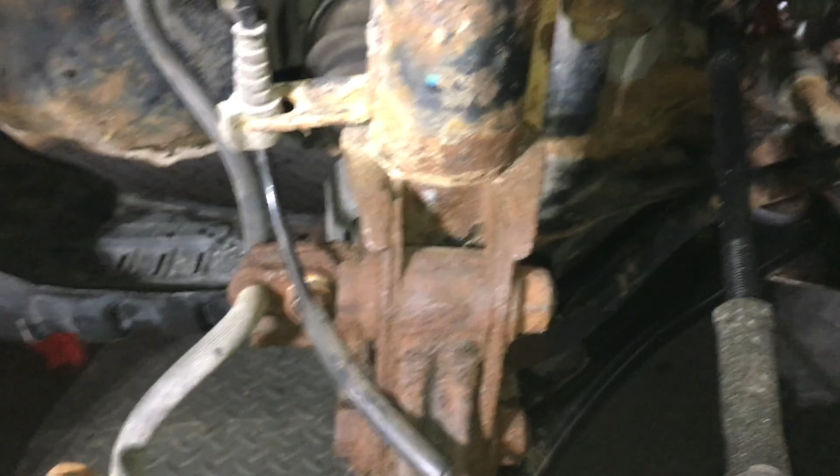Okay, so the struts next. I've already shown you. There's a video you can look in the back catalog showing you how to replace the struts. But essentially, it's just the two bolts and the nuts here. Do not reuse the nuts. The manual says the bolts apparently you can reuse.

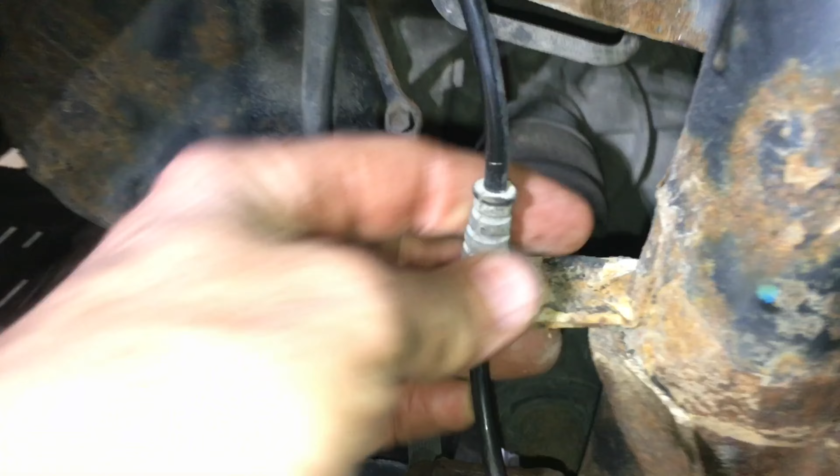Just remove the wheel speed sensor. Just a little clamp. Little 12mm headed bolt here for the brake line. Just remove it. And yeah, these are not cooperating, so I'm just going to cut these off because I'm going to replace them with the new struts, the links.

And up top, just index the plate here so it'll go back in the same spot. Just a matter of replacing the rod end nut here, and the plate will be removed, and the whole strut should drop out. So once the bolts are out, as you can see, they came out actually not too bad, so lucky.

Just make sure that you're ready. Don't let this unload and flop forward, but of course the control arm is there, as is the tie rod. Just support it as you actually pry it free, and as you can see, the whole strut is free here now. Just a matter of undoing the nut here that's on the mount. Hold it internally with a 6mm Allen key, and if you have an offset wrench, ideally 17mm for the nylock nut that's on top of the rod end.

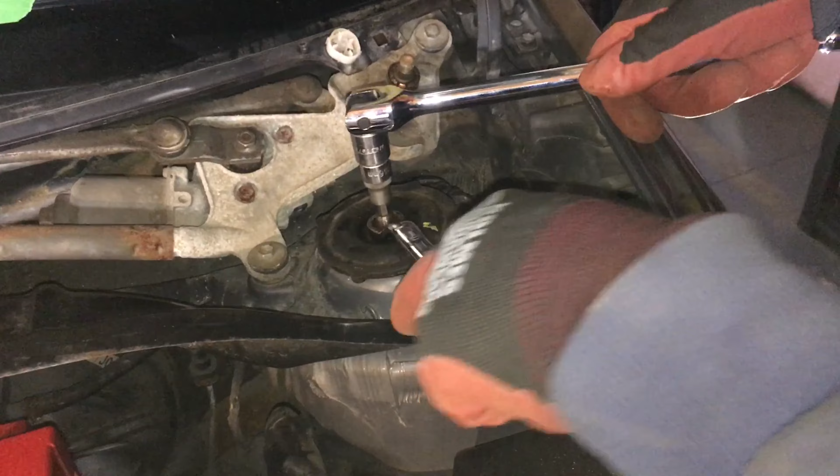Go ahead. Oh, okay. Yeah. There you go. There we go. Much better. There we go. There we are. Yeah, it's a little extra.

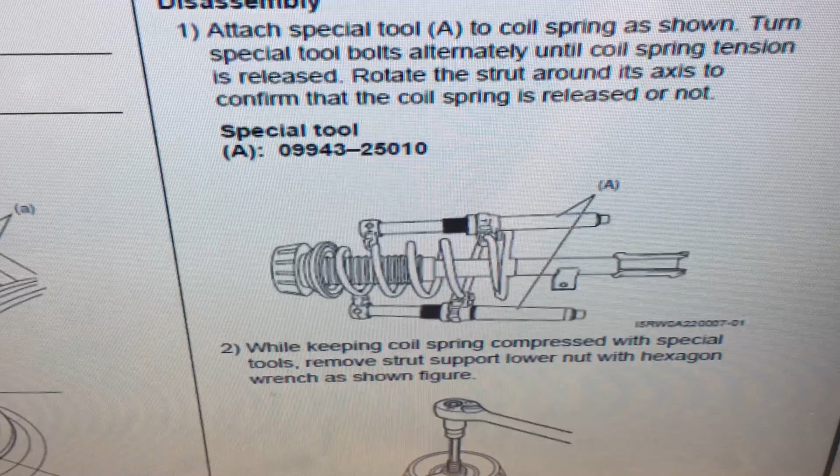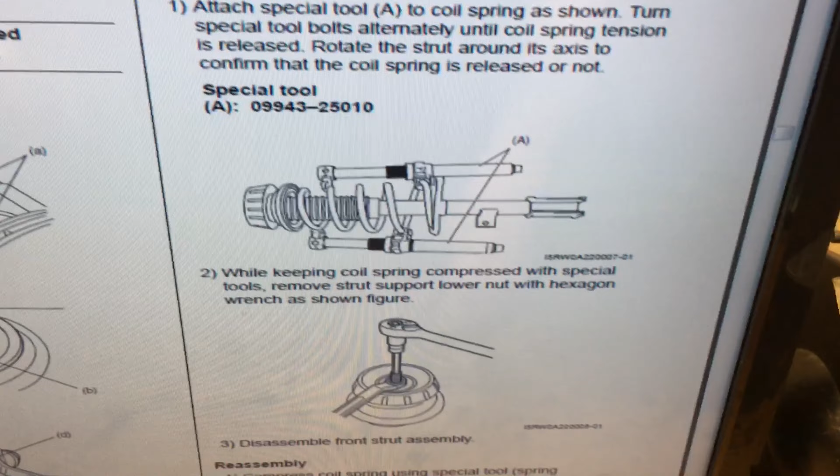So I'm just back at it here, guys. I've got both the struts removed. So I'm just going to go about removing the coil, transferring it over to the new struts, and bits and pieces transferred over. I've already done a video on the struts. I'll put a link in the bottom in the video description, so you can take a look at it in more detail. There's no point in really repeating myself, but I'll maybe show you a few points of interest along the way.

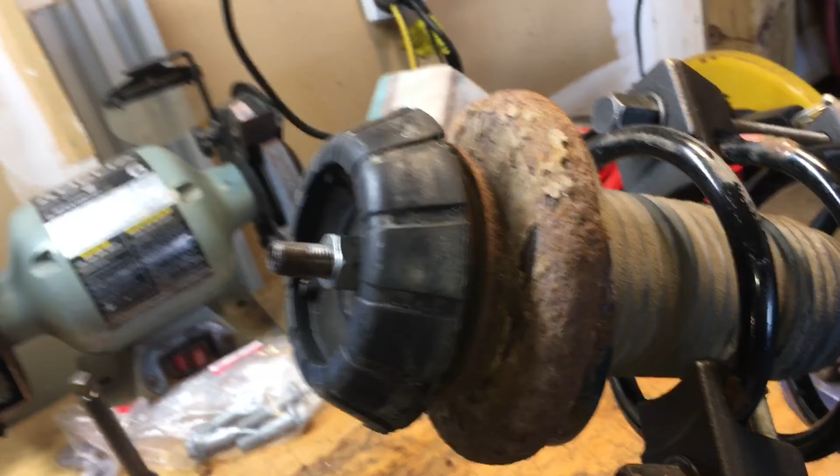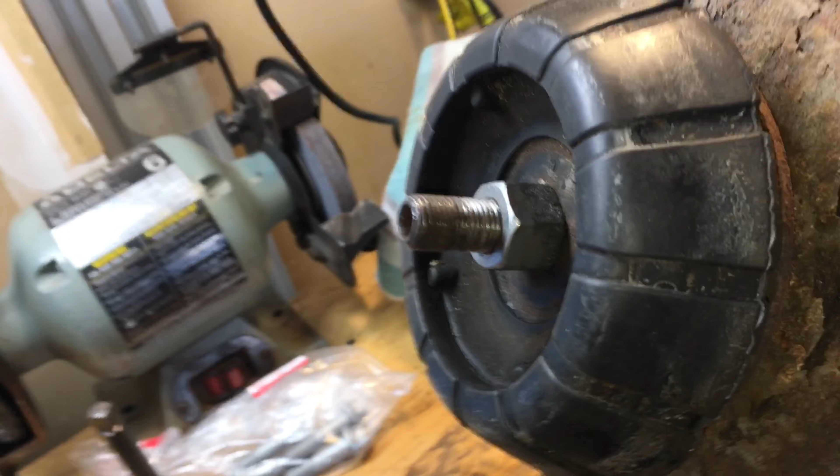So not as fancy as Suzuki's tooling here, guys, but I've got my Widowmakers on here in order to compress the spring, take the tension off the rod end and the shock itself within the strut, so I can undo the nut here, right? Just take a measurement of the distance of the nut, just how deep it is on the threaded portion of the rod, and we'll be able to disassemble it without this exploding in our face, hopefully.

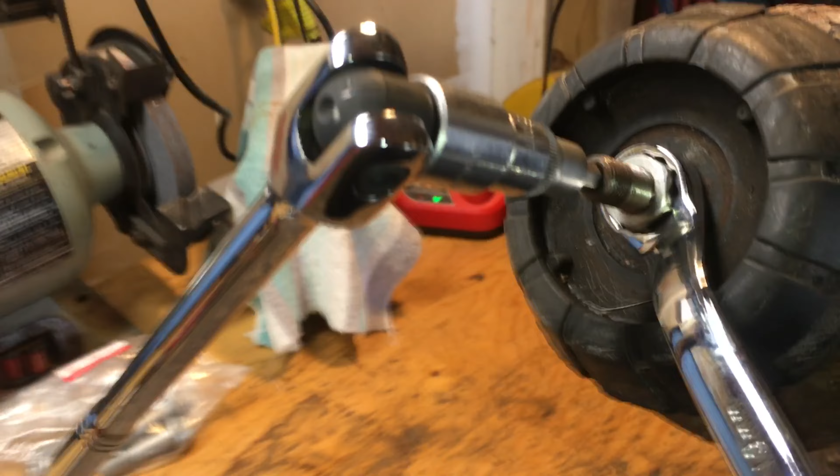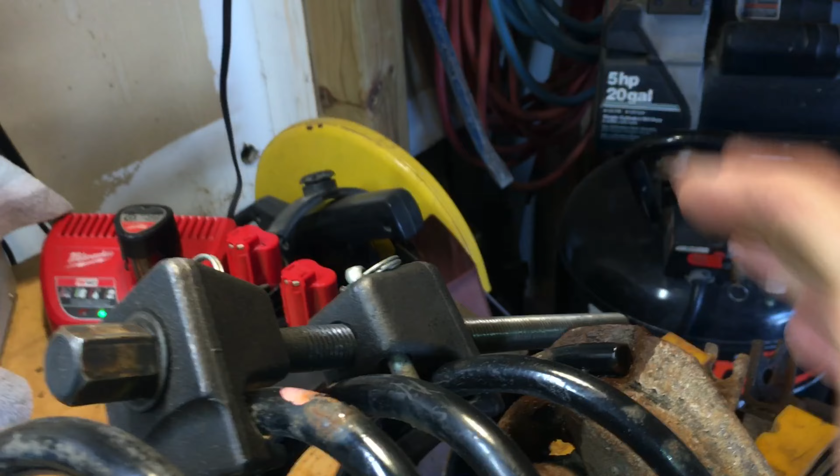So as the manual illustrates there, guys, you'll need a 6mm. You hold the inside of the rod Allen, and a 19mm, preferably offset, as it's sunken a wee bit into the mount, and just spin the nut off. Once it's all unloaded, of course, so the spring is compressed here. I can't do it with one hand, but I can rotate the spring on the saddle, so I know it's all unloaded.

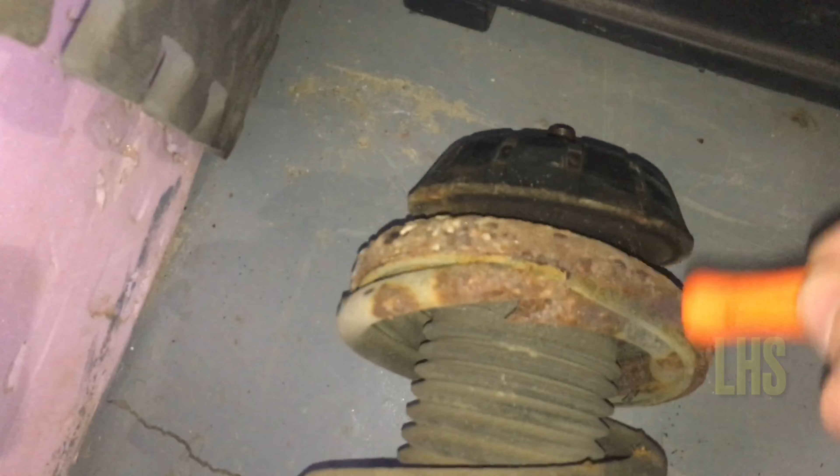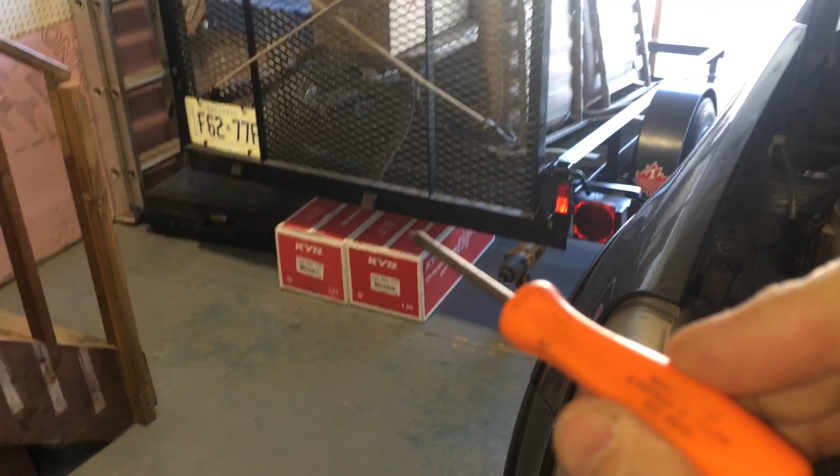Sometimes you can't win for losing, huh? So I never noticed on the removal of this, but on closer inspection, you can see the spring is obviously broken, right? So this threw a wrench in the works for me, because I had already ordered the strut, the damper portion of the strut, as you can see there.

So you cannot buy just the springs for the SX4 on the aftermarket, as far as I can tell. Perhaps I'm mistaken, but I checked a bunch of websites. I called a number of local places. They couldn't find a listing anywhere, so at least I couldn't get the springs, let's put it that way. So I had no option but to actually buy the springs from Suzuki. Yeah, there are still places in Canada that will sell you Suzuki genuine parts, right? Mitsubishi spring apparently, but there's lots of Mitsubishi parts in the SX4.

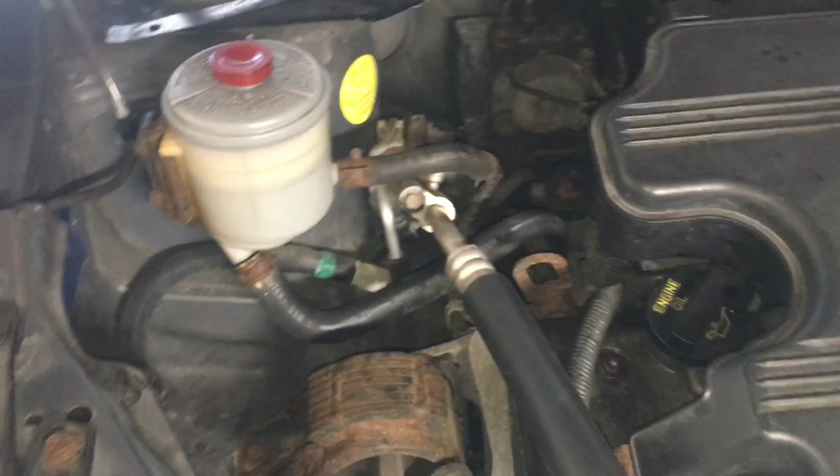So faced with the expense of returning the dampers and then buying the Readystrut, it was changing 4 quarters for $1 type thing, so I decided just to go buy the spring, right? So that threw a wee bit of a wrench in the works, but we'll carry on. We'll be replacing both springs. I could have cheaped out and replaced just the one, I suppose.

It's always best practice to replace parts in pairs, you know, springs, dampers when it comes to suspension. But anyway, we'll carry on. A couple of new springs.

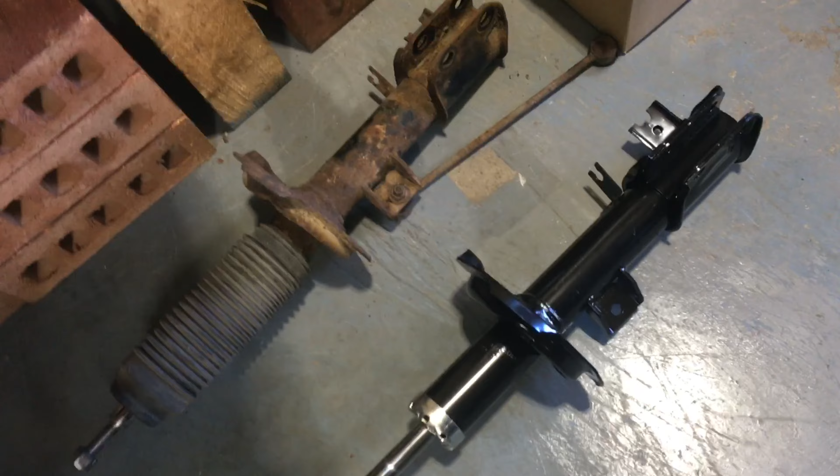So it's been my experience, guys, that the KYB struts and dampers really closely resemble the original equipment. This is the right hand strut. That's the right hand part number. Left hand in there still.

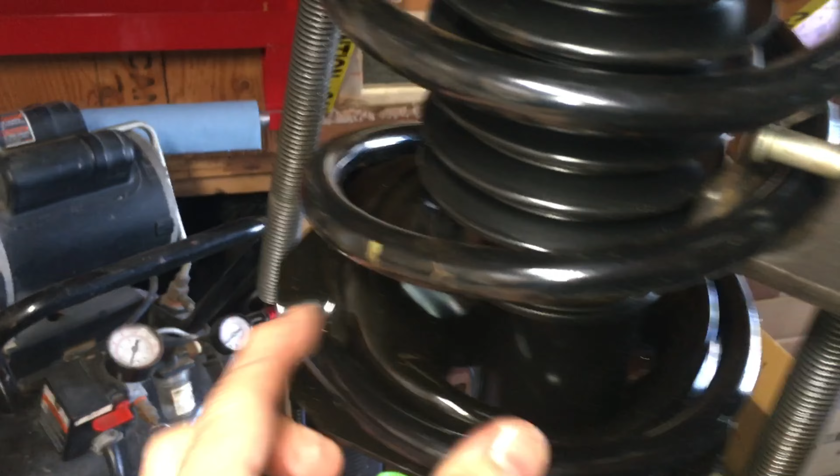Left hand. So with the spring held in my vise here, guys, just to keep it stable, you can see the spring is actually seated against the stop in the lower seat, and the new boot is in place. It looks a wee bit different. Just follow the instructions that come with the product. It tells you how to orient things.

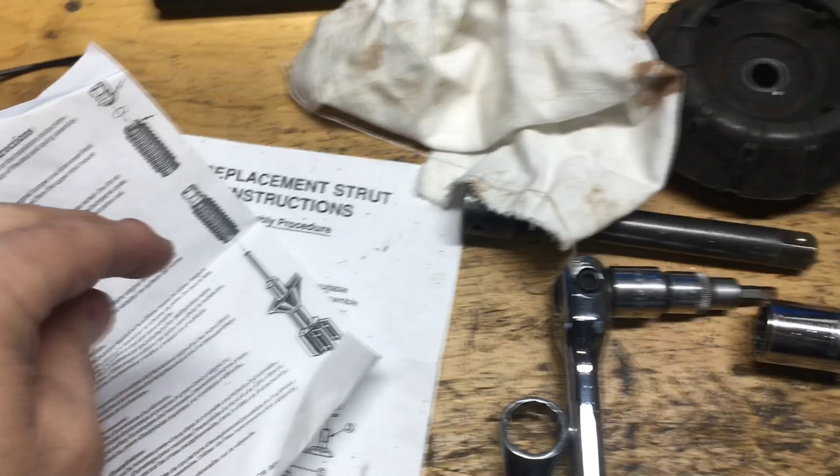And yeah, I've got just enough thread here that I can put the upper spring seat in position. Just got some anti-corrosive on here. It's quite heavily corroded. I've scraped it, but still sound, I think. I hope. And the bearing goes in position, so it kind of stacks like this. I'll show you on the drawing, and then the new nut goes on top. Yeah, makes sense. I'll show it to you on the drawing.

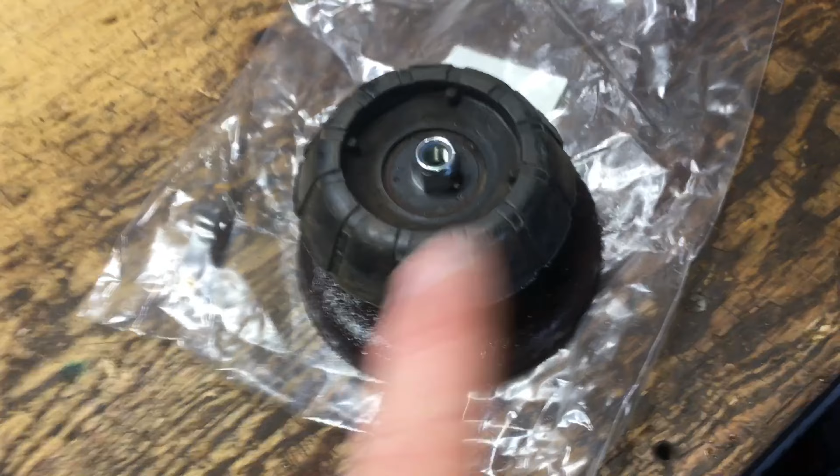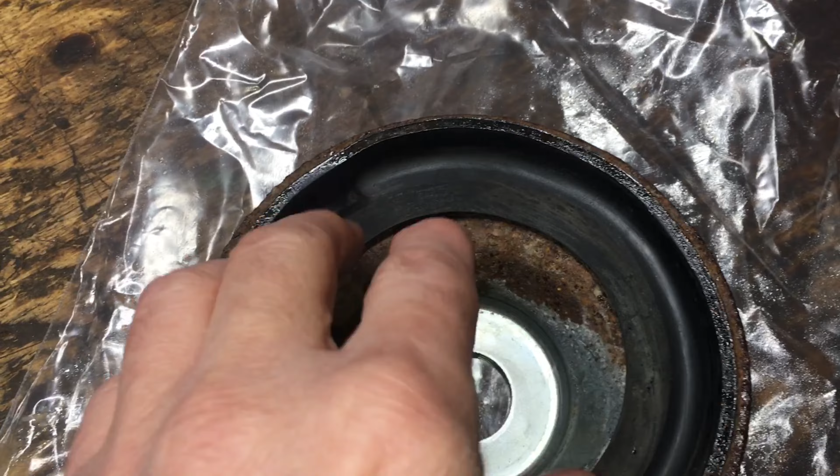But a couple of points of interest here. One was make sure the spring is oriented correctly there. Mark everything if you're going to reuse it. It makes things easier for when you put it back, right? But since this is a new spring, use the inside of the upper spring seat. There's the rubber cushion, the rubber isolator. There isn't one for the bottom, by the way, as far as I can tell.

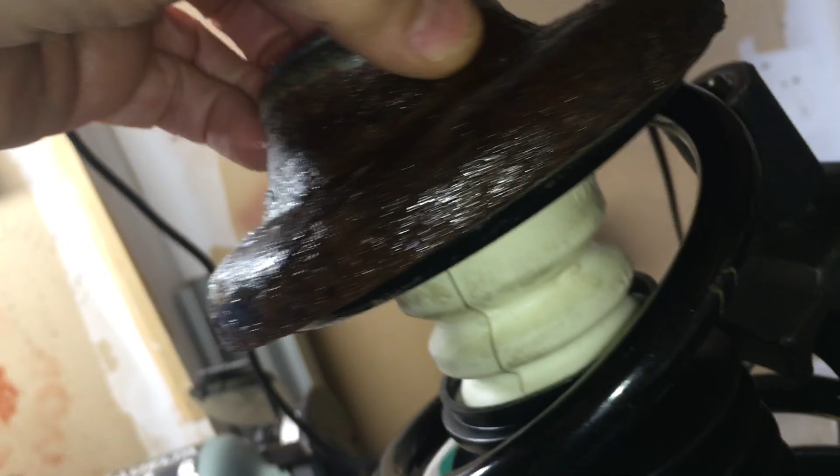And you can see here where the spring actually sits. Now keep in mind, this is not symmetrical. You can see the cant to it there. So it's important that this is oriented correctly. Just use the depression in the cushion. You'll get it to drop down. You'll feel it. I can't really show it to you, but you'll feel it.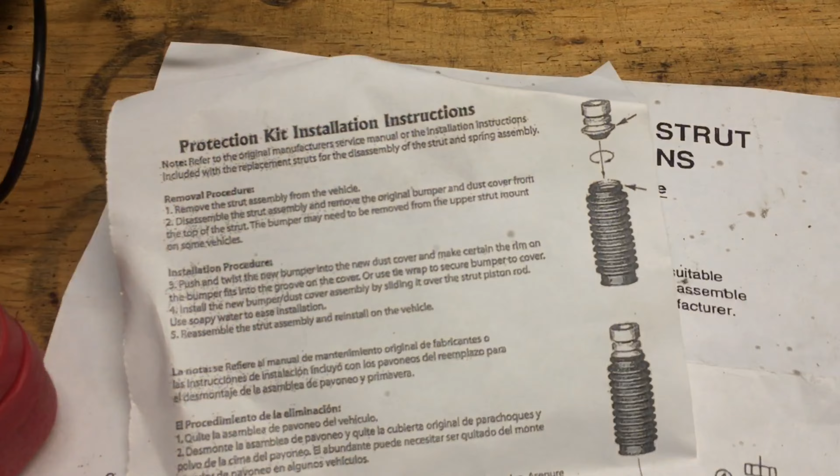So here's the strut assembled, guys. Precariously balanced on the workbench here, just so you can see it in the correct orientation. And again, here the focus is on the stack itself. Again, the original bump stop and the boot a wee bit different. So this configuration looks a wee bit different, but it's assembled as per the instructions. And the important part is the stack, right?

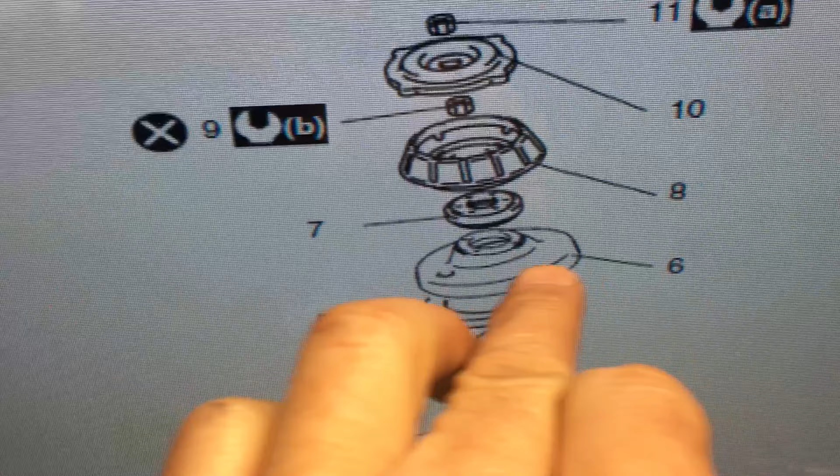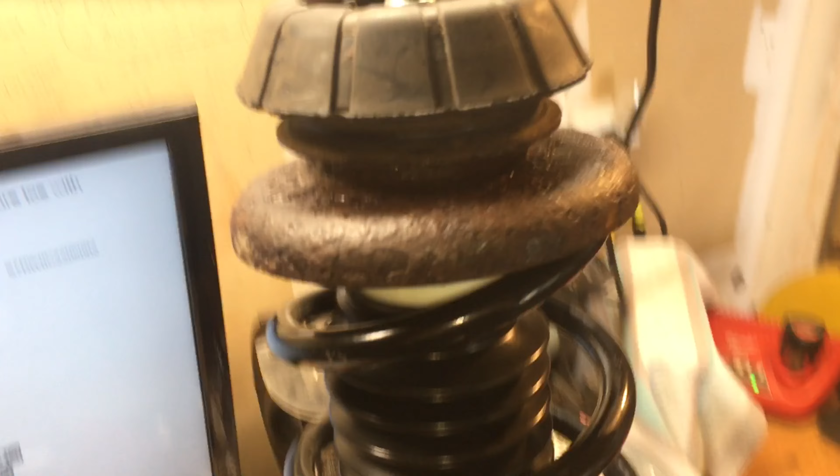The cushion ring, the upper seat, the bearing, it needs to be oriented correctly. It's obvious which way it goes. It slips down into the upper seat, and then the rubber mount itself, then the nut, and of course the plate and the nut is to be assembled as is on the car itself, right? And that's what it looks like. Just make sure everything is oriented correctly.

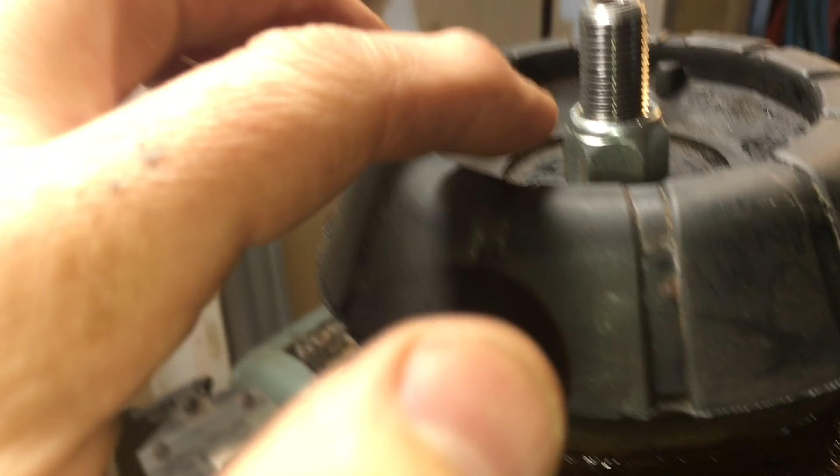Here's the torque spec, although you're going to need a pretty fancy tool in order to be able to hold the rod end here and actually be able to put your torque wrench on it. You're going to need a pretty low profile and slim crow's foot to get on it. I'll be honest, I just held it and torqued it up with my 17mm offset spanner there.

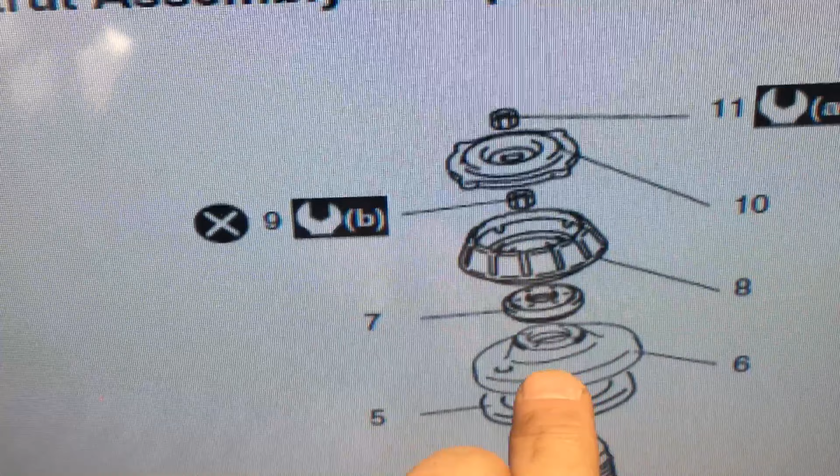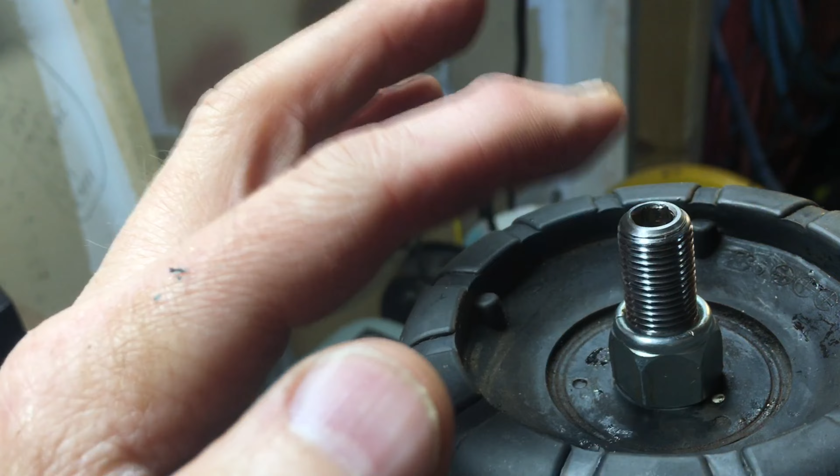Don't reuse the nut that goes on the end of the rod end. Surprisingly, there's no washer between the rubber mount here and the nut. It's a nylock nut. Do not reuse it. A new nut comes with the damper. I've had these cars a lot longer than I ever anticipated, guys.

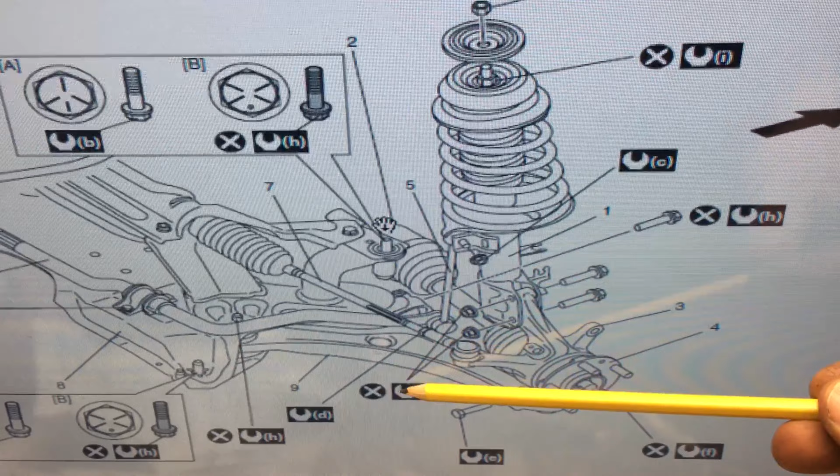You might thank yourself later if you just anti-seize the shank on the bolts. We've got a thread locker, entirely up to you. New nuts are required as per the manual here. As you can see, you can reuse the bolts. The installation consists of the two bolts and the nuts, of course. This is the forward orientation, so the nuts should be on the aft side.

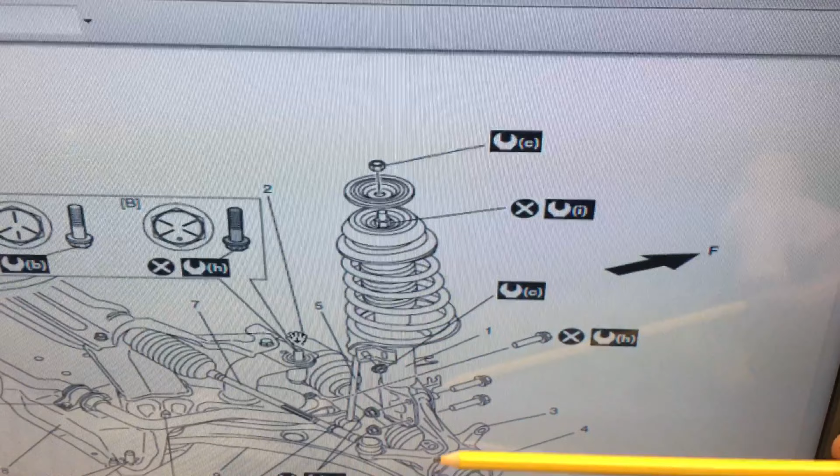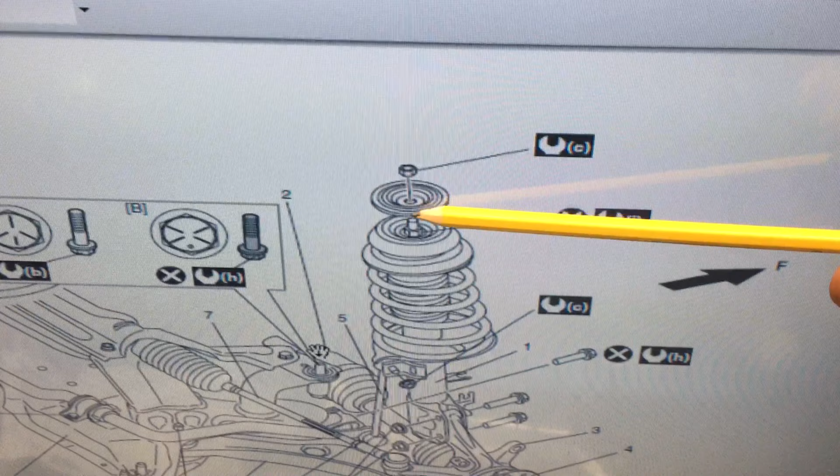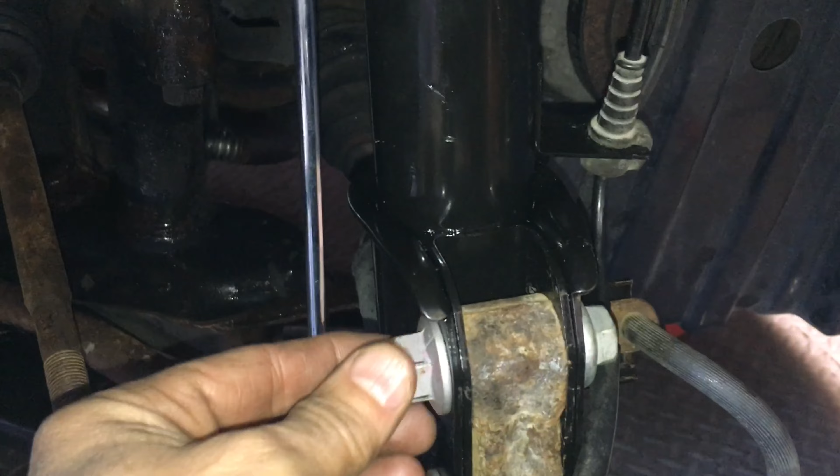The strut itself, we'll put on a new vertical link shortly, and there's the brake line to be secured, the wheel speed sensor, and on the top here we have the mounting plate and the strut nut. So pretty much fully assembled here, guys. The bolts and the nuts, again, the nuts on the back side, to 101.5 foot-pounds, 102.

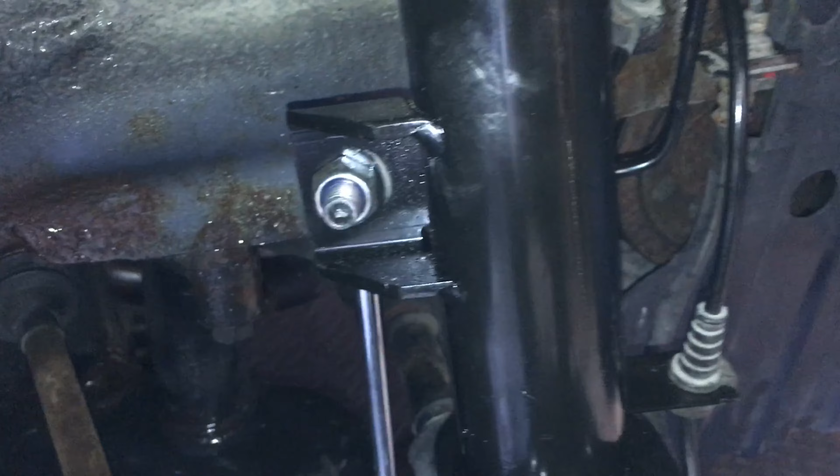One thing I can mention here, don't ask me how I know this, make sure when you drop the strut in that you have the wheel speed sensor harness on the right side, which is the forward side of the installation. Otherwise you'll trap it behind and then you have to take your nuts off and, you know, the usual nonsense. Make sure you secure the brake line with no twist in it, of course. The dog bone here, the nuts are torqued to 32.5 foot-pounds if you're very particular about things.

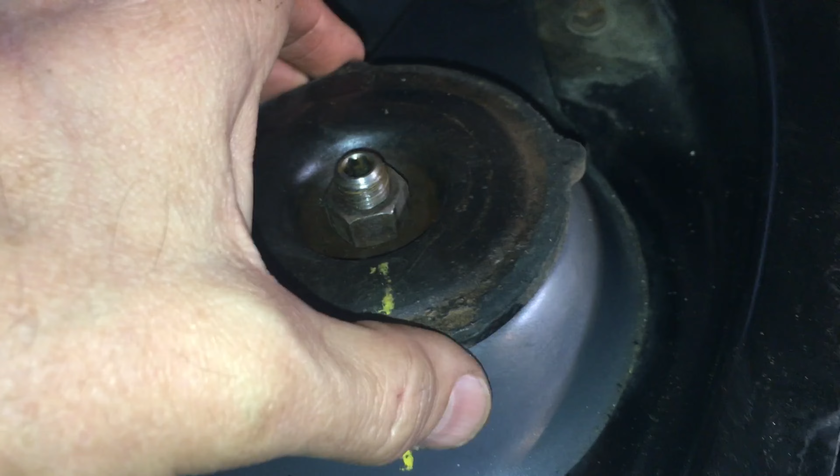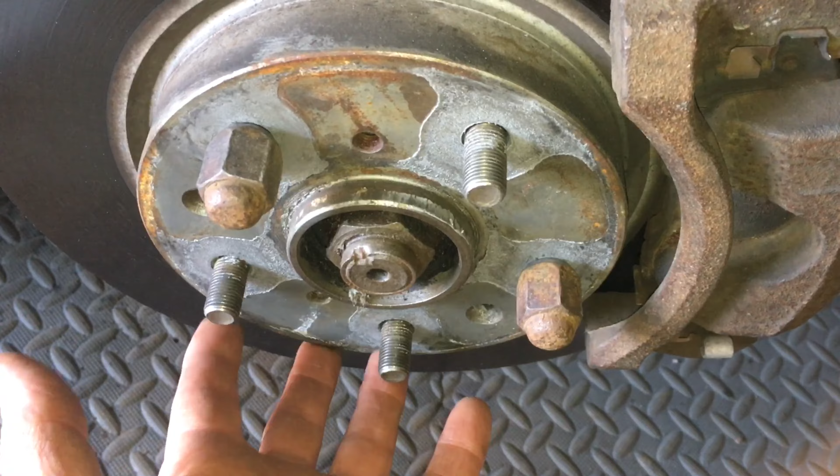And on the top side, the nut, again, index this, so the plate will be in the same orientation as it came off. You might want to put your floor jack underneath. I still have my brake on here, as you can see. I just lifted it with a floor jack so that you can actually have the threaded end of the rod end up, so you can put on the strut nut.

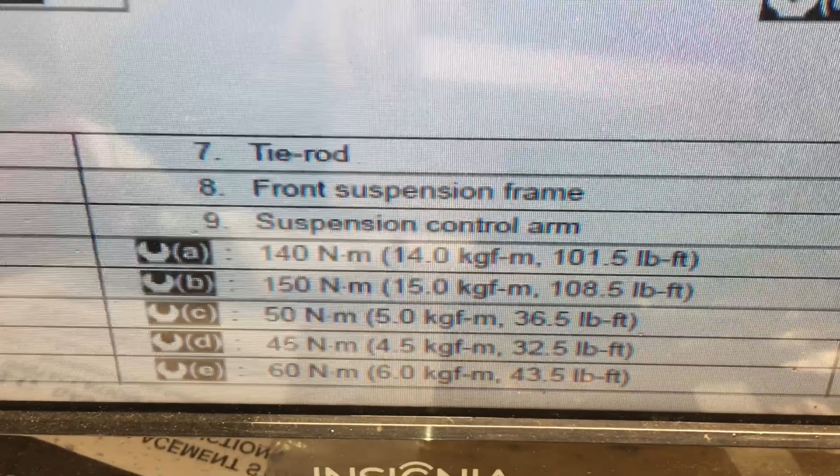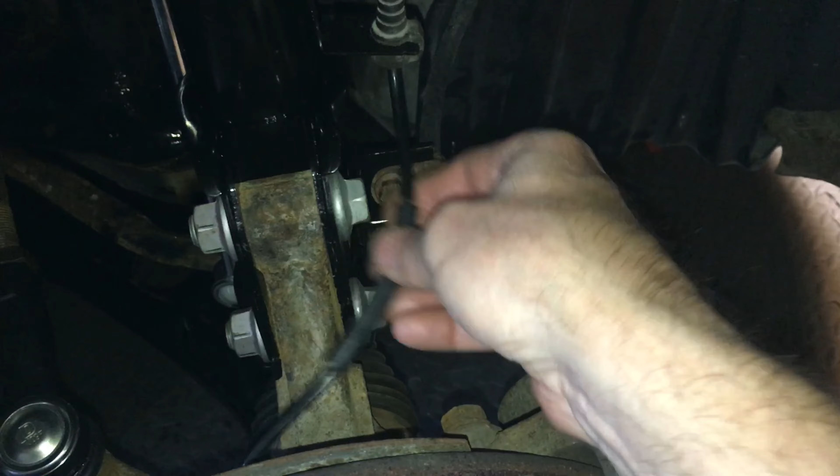And it's also torqued to, I don't know, I haven't done that yet, to be honest. See, it is torqued to 36.5 foot-pounds, 37 foot-pounds. Okay, rinse and repeat on the other side. I noticed in playback, guys, I mentioned to make sure you have the harness on the right side, and that would be the right side for the right side of the car. What I should have said is the correct side, the forward side for the harness, so it's not on this side and you have to undo everything.

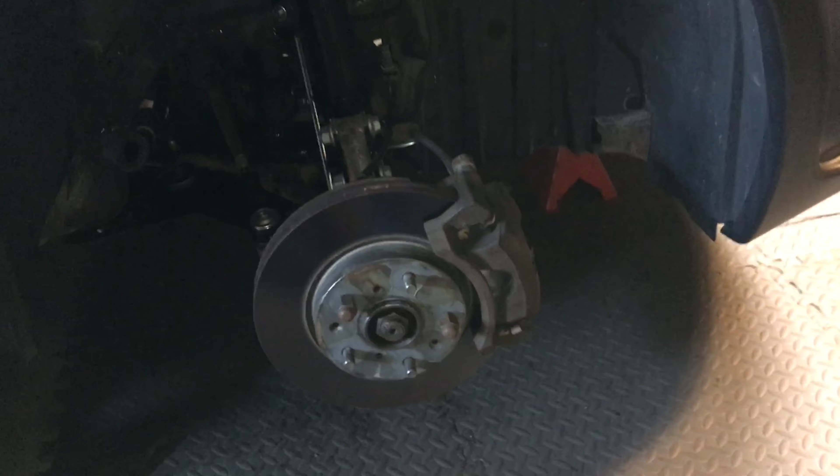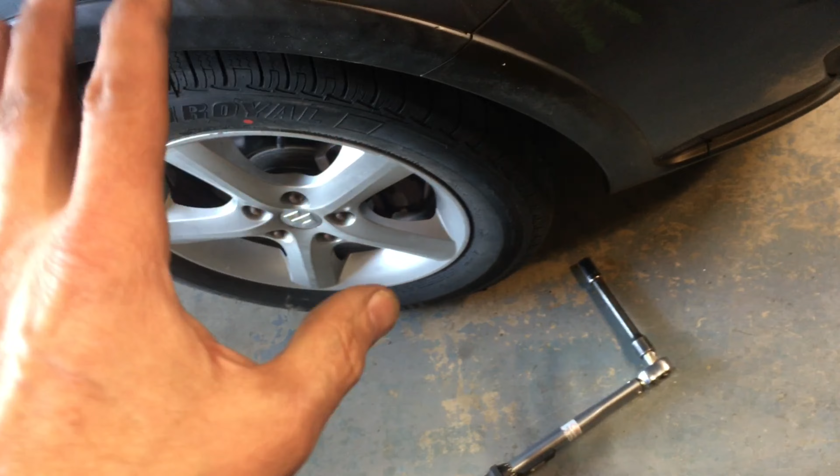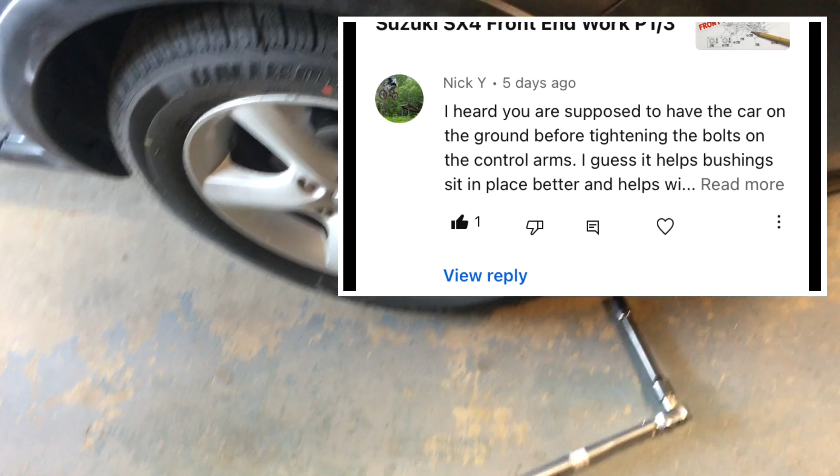So I'll do the other side, and then I'll show you the car when it's buttoned up, all the plastic is back in place, and the car's going to go to the alignment shop, as I've mentioned multiple times. It's booked for an appointment. Worth mentioning, I actually slacked the lower control arm bolts, and once the car was back on the ground, retorqued them. My pal Dave made a video of that a couple of times over, I think. It makes good sense, and one of the fellas mentioned it in the comments, so I did that once the car was back on the ground.

69 foot-pounds on the bolts. That's it. Everything buttoned up. Nothing left to do but take it for a wee test drive. As I said, it's scheduled for alignment tomorrow, so hopefully all's well.